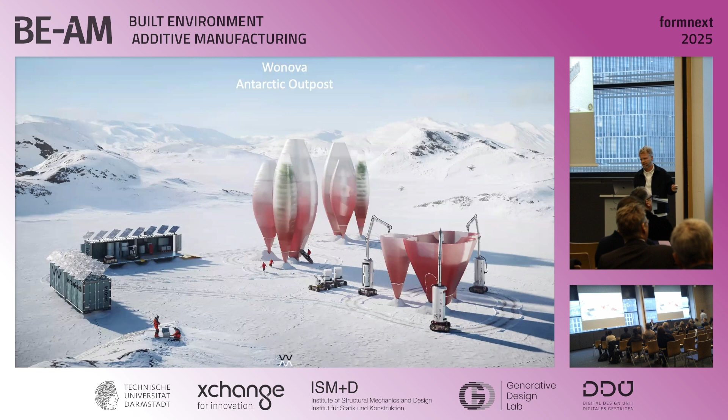This is a different kind of remote 3D printing, part of our Wonova project, which really got us started - or restarted - into 3D printing. We were thinking about how far you can go out to the Antarctic, what that might involve, and how to trigger people like you into what we're trying to do. But there was a more pragmatic approach within that project too, where we at least had a typical use case: thinking about renovation of facades. We know this is a large, up and coming market in Europe, and how might that be done in the future?

By pragmatic, I mean we stepped back a moment and thought about the certain layers to a facade - interior, exterior, structure, waterproofing, insulation - and we broke that down in an abstract way with a little bit of computation, which you'll see in a moment, understanding, as you saw in the last presentation, what that could be in the future.

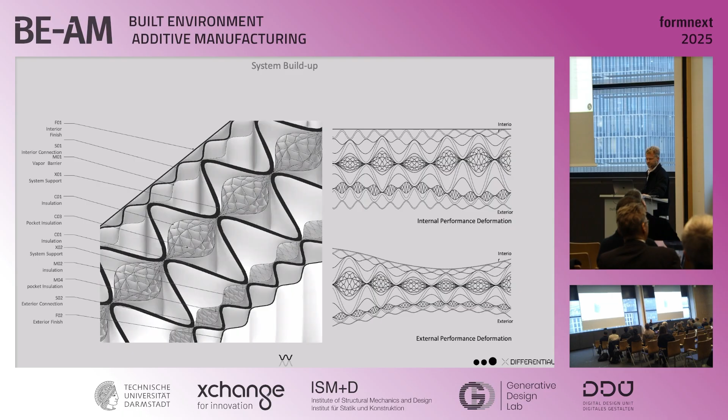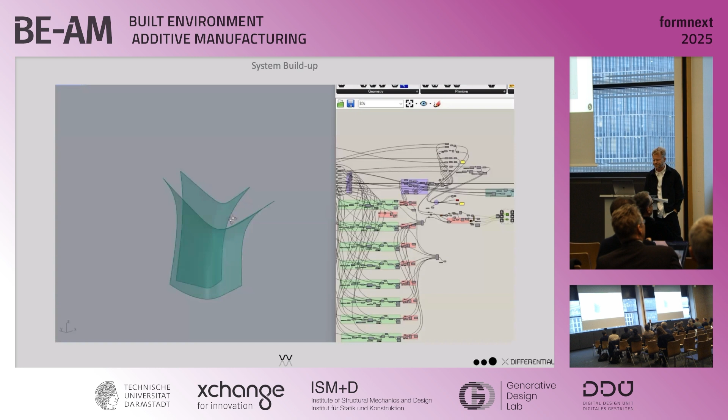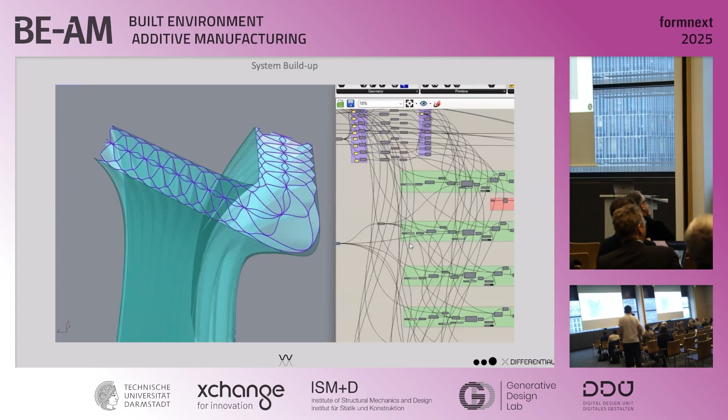With our friends from Differential - you'll always see we add our partners into the slides as often as we can, we think this is super important, just an aside, we don't do this by ourselves - the computation for Wonova was about determining the amount of structure or thermal insulation we would need. Of course you get the obligatory grasshopper screenshot to go with that, to understand what we might need for a building.

And then we took that even deeper. We thought - my particular background is in facades, where I know Uli from a former life - what could that detail be? We're looking here at our idea of thermal separation while maintaining structural continuity within this wall system.

But we weren't totally crazy. We had some help from our friends at Eckersley O'Callaghan, rather well respected, and they took us seriously, unbelievably, to think about what we might need, for instance, to get below a 0.25 U value. What would that take? In this case we're also using PA6 as the conceptual material. So not only is it a big vision, but we're saying okay, how might we get there, taking it as seriously as we could.

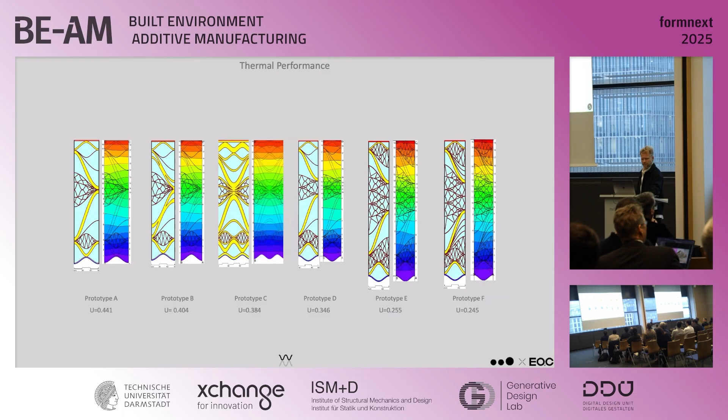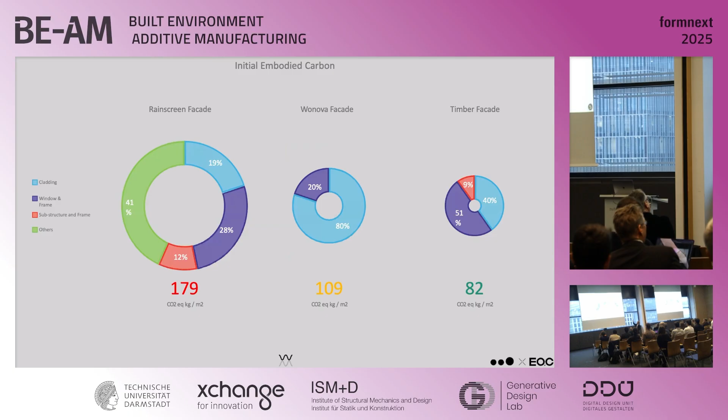The other side of the work they helped us on was to look at embodied carbon. Part of the project, and the goal of the project, was to understand that this could be constructed or printed, demolished, shredded, and reprinted on site. Your initial build's carbon footprint is not as high as a typical facade, but higher than timber. The idea is that if we can recycle, that footprint goes down precipitously - after 2 rounds of recycling, the carbon footprint goes down. That was another piece of the proving grounds of this project.

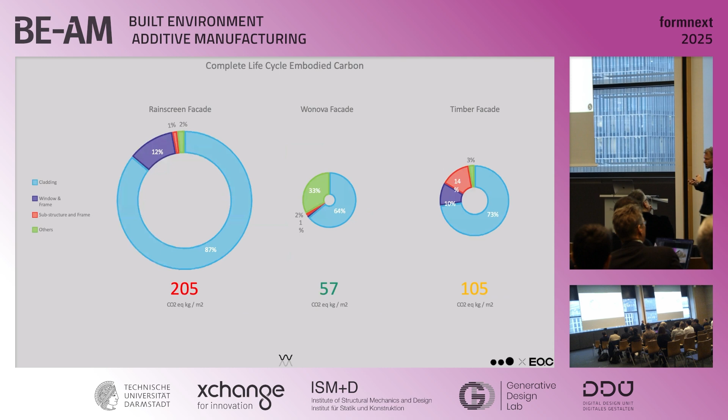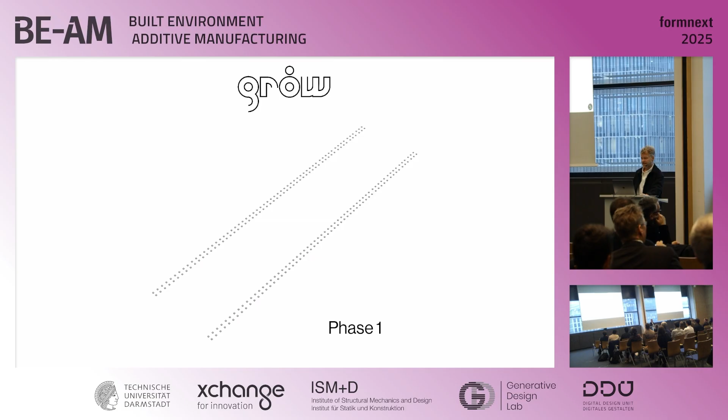We take that, again, to the next scale. Very interesting to see the guys from SSV do this at an even bigger scale, with somewhat less complexity perhaps. But this idea of grow was combining the idea of 3D printing with the idea of progressive housing.

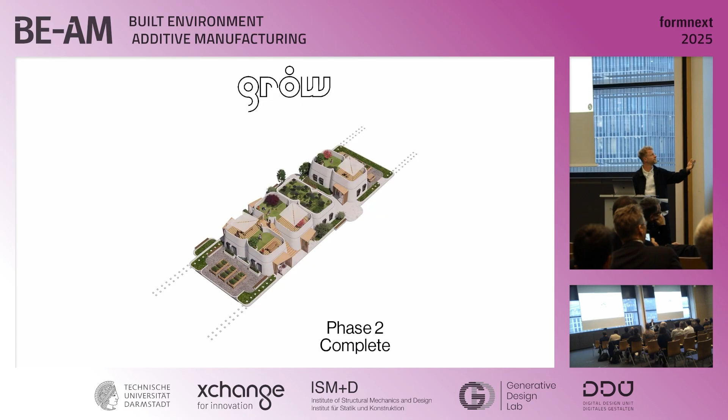So, back to phase 1. You might lay down the tracks, you have the gantry come in, you print the first phase of a house, someone can live there. Second phase, when they have enough money, perhaps, when the time is right, they print the second phase. Again, you see there's some ideas here of having prefabricated roofs and such. This will come back in a later project as well.

So the specifics of progressive housing, as some of you might know, is common in South America for instance, is about allowing people to grow. Our idea is using 3D printing in order to improve people's lives. So just like this, as we say, there's a young family, then the family grows, and grandma moves in, and you have the possibility of growing.

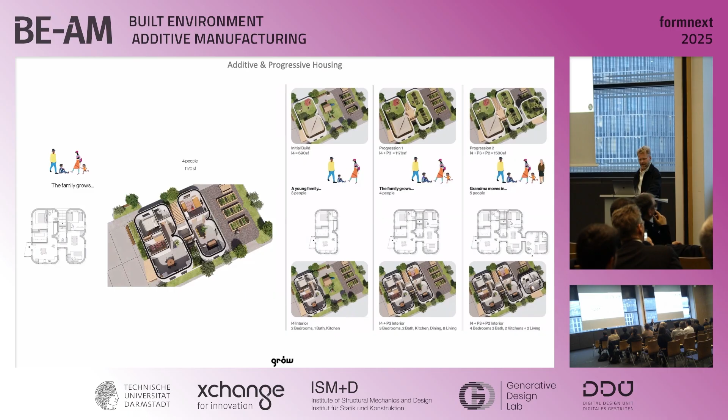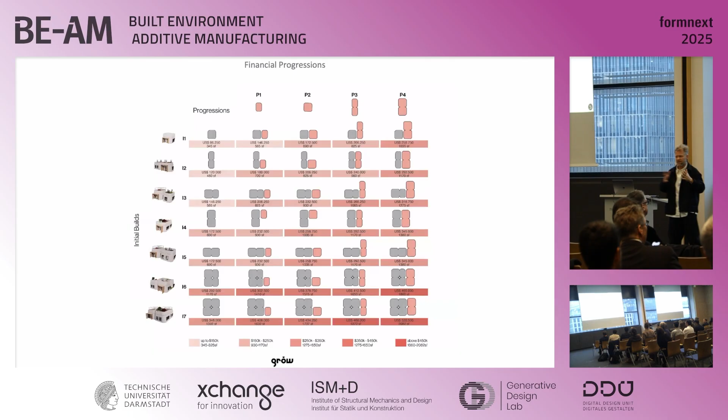And of course, within that, you could go from your smallest house, 350 square feet, $86,000, up to maybe 2,000 square feet and $520,000 over time, with assistance, and as we imagine it, with assistance from the neighbors in your neighborhood.

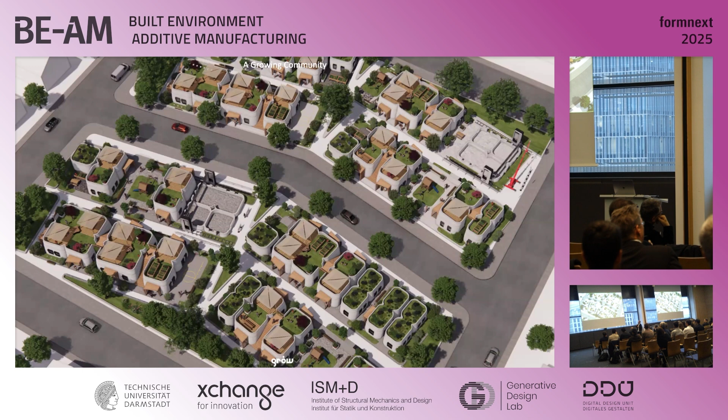This project was also about creating that community around progressive housing. There are companies and organizations such as Habitat for Humanity in America, where the project was based, and where people are helping each other. So we think about upskilling, sharing, shared spaces, and use of community spaces.

And of course, important with that is to bring in as much responsibility for the community and for the environment as we can, whether that's rain collection, adding greenery, creating small amounts of wind energy, and lots of green areas to be shared by the community.

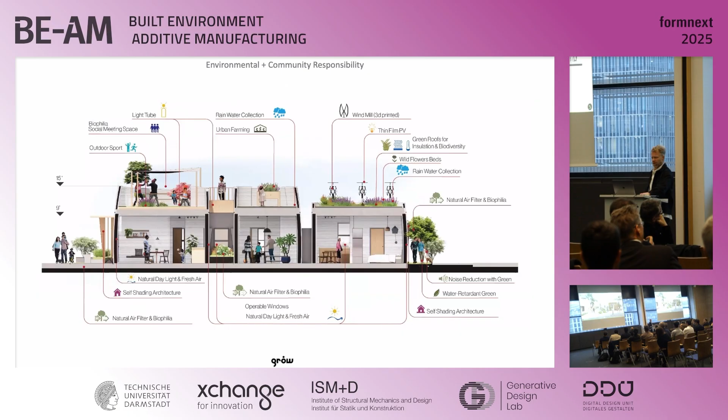And we think this is, and I'm really excited to see from the guys from SSV, that this could be a possibility, and the possibility of using a new technology to create a positive societal effect.

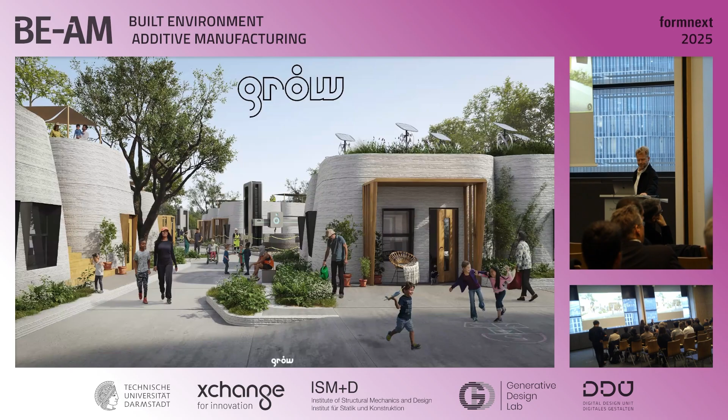Let's say at the opposite end of the financial and architectural spectrum from progressive housing, this is a project with an undisclosed client around the Mediterranean for a remotely located house in a harsh environment, where the client was interested in pushing the future and the technology of the possibility of their house, and we thought, well, it's a good instance to think about 3D printing with on-site materials, for instance.

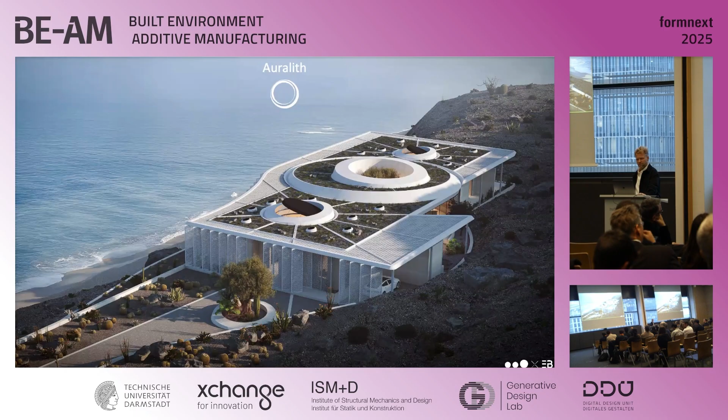So the big idea of the project, from the realization to the process, is to extract some soil, rocks, gravel, etc., from the side of the mountain, and use that for the production of the house. Luckily enough, there was some usable materials for the concept.

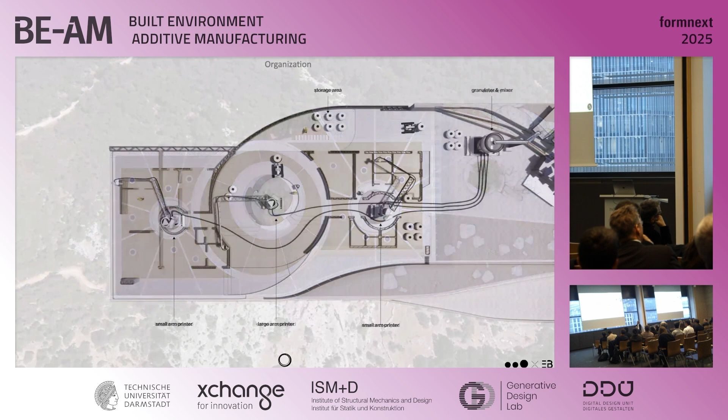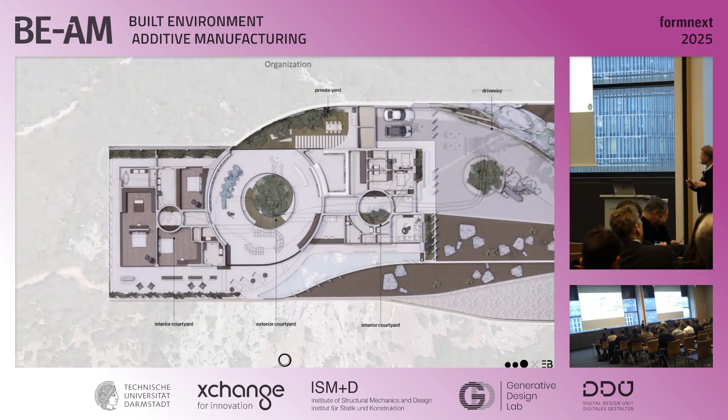And so what was important for us is using the organization of the construction production process in the organization of the house itself, and of course the end aesthetic, where you see, for instance, the courtyards are created where the robot arms are, and then the way the roof is divided is about being able to prefabricate it.

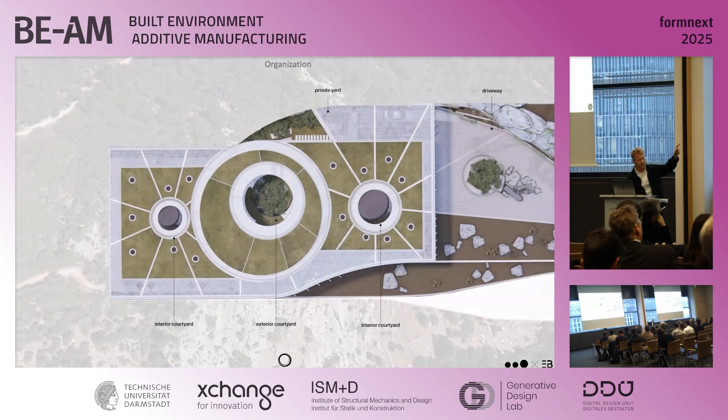And as I'll repeat again, it is a house first, right? It's not just a 3D printed house, but it's a house. And I think this is part of where the industry is now and should be.

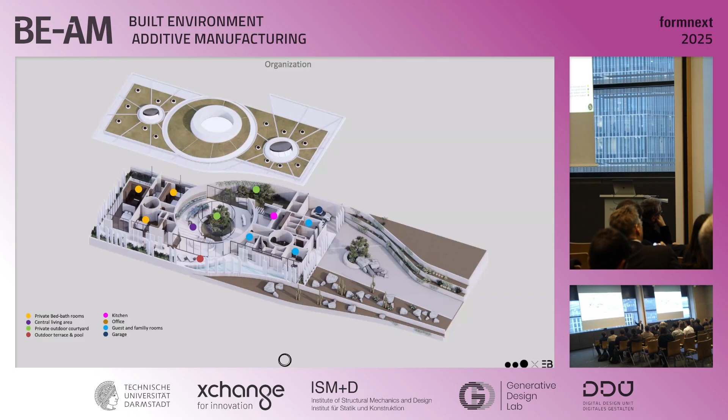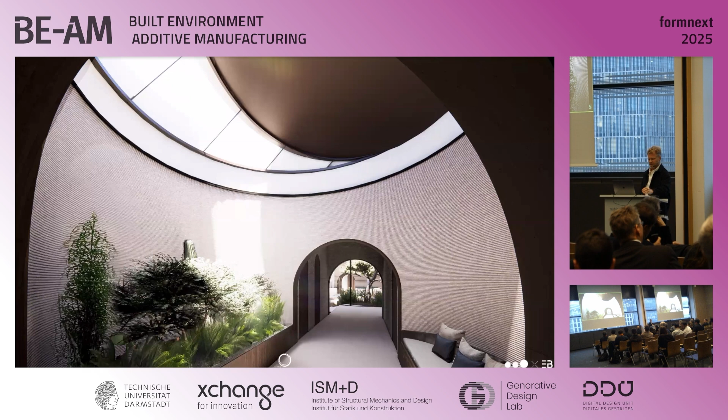So in the front, there are common areas for families and guests. In the middle, the living area, and towards the back, the private areas for the family. It's important that spaces like this, which is where one of the small arm printers would have been, but is now the entrance and the main distribution area for people going to their guest bedrooms, has a wonderful effect and a beautiful appearance for the users.

Then in the middle, of course, the whole house is centered around a central exterior courtyard, and the kitchen, living room, a pool, the back patio, etc.

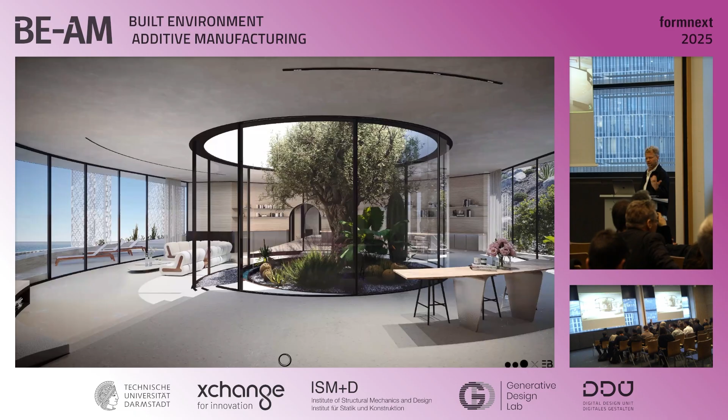Once again, remembering exactly how it was built and using that for the effect of the living space. And it sits then kind of gently, simply on the edge of the mountain.

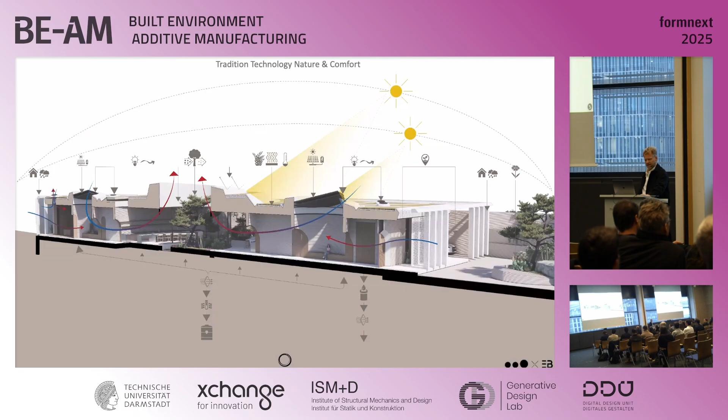So for instance, in the small courtyards, you have the small wind lenses. The automated screens are also meant to catch some humidity in this sort of desert and oceanside climate. The roof is xeriscape, this kind of desertscape, which would also collect water when it rains, because when it rains, it pours. And of course, the large wind lens in the middle is the main ventilation and light providing area of the house.

And of course, this here is looking from one of the small courtyards through the middle, through the other, and this is really kind of what the house is about.

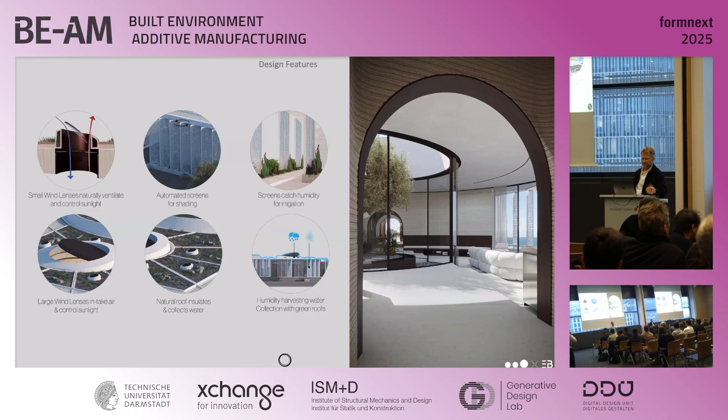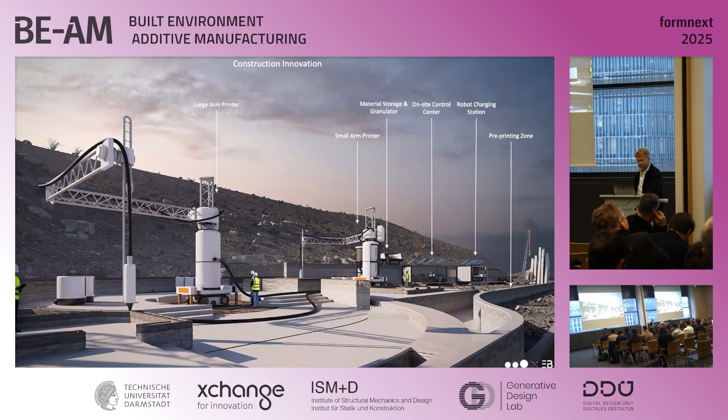Luckily, we've begun to realize things as well. So most recently, and what you can see at BE-AM and also on the Smart Materials and Nagami stand, is the Septa chair, where we've begun to lay maybe that first layer, or the next layer, in our process of bringing 3D printing into design.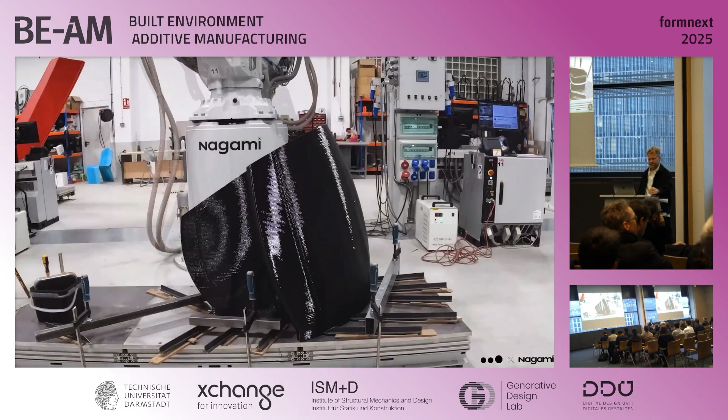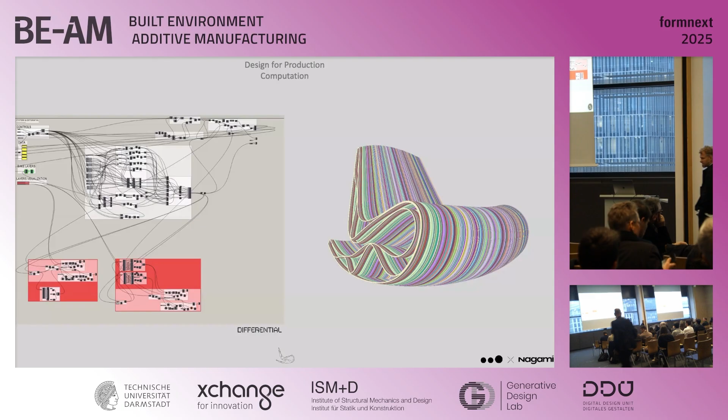In this case, once again with our friends from Differential, we sliced the chair in a way that's very important, given the complexity of the form. We sliced it so that there's an alternating set of lines, or of paths, I should say.

When you see the chair, I encourage you to check it out at the BE-AM stand, and there's a different one also at the Smart Materials stand. Sit in it, feel it, and for us what's really interesting with this path—so it's an AB-AB combination. When it starts over here at the end, you will see in the blue, it will double back. And each at the top and on the bottom and the back, it needs to switch back and forth.

And this, for us, of course, was a necessary solution to solve the kind of 3-layer problem. Otherwise, you need an even number of layers in order to make a continuous loop. So that solved that problem.

But then it gives us something much nicer, which turns a 3D printed chair into a chair that's 3D printed, meaning that we then really can focus on the details. We focus on the way that each surface hits the other. We focus on the way that the structure hits the surface below. And we focus also in a very, very strong way with the guys from Nagami, who really can pull this off in an unbelievable way on these seams.

And for us, this is like the most important detail of the chair, or the real detail of the chair, what you won't see anywhere else, besides just the quality, but to say, okay, this is now what we feel is something different. We're taking this a little bit to the next step. So first of all, this is a chair. It's comfortable. Like I said, I encourage you to go sit on it. It's lovely. I say that as objectively as possible.

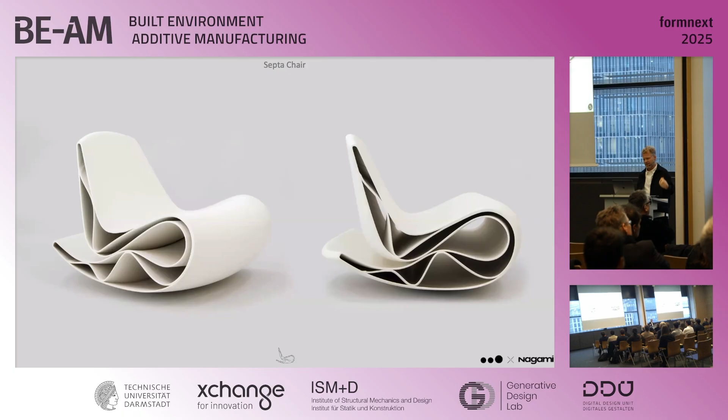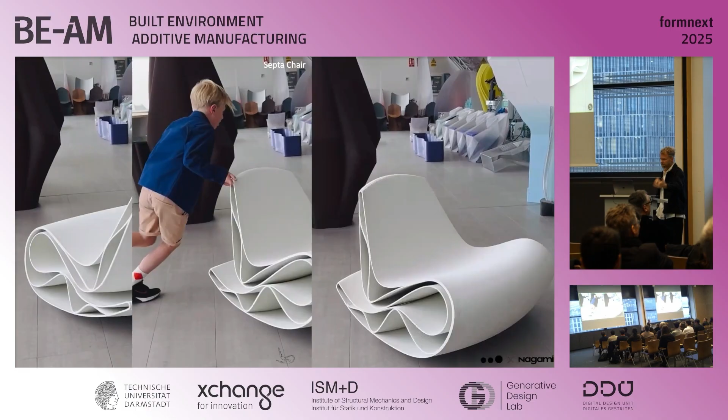But we are now being able to take some of the ideas that we've had and push them forward. And we hope that this is now one small layer for us, for everyone else, and moving towards a wider spread, more democratic use of 3D printing. Thanks.

Oh, you're not on. Okay, now officially, thank you Rob. Was it time? No, there was a raised hand. Or was it a stretch? Oh, it was a stretch. Yes, no cracks. Any questions from the audience? Obviously not, to be honest.

Where's the house, the second one? Undisclosed location, unfortunately I'm not allowed to say. But let's say a desert environment along the ocean. That's all I can say, sorry.

It takes... yeah, so Adi? No. Thank you, thank you for the talk and the presentation.

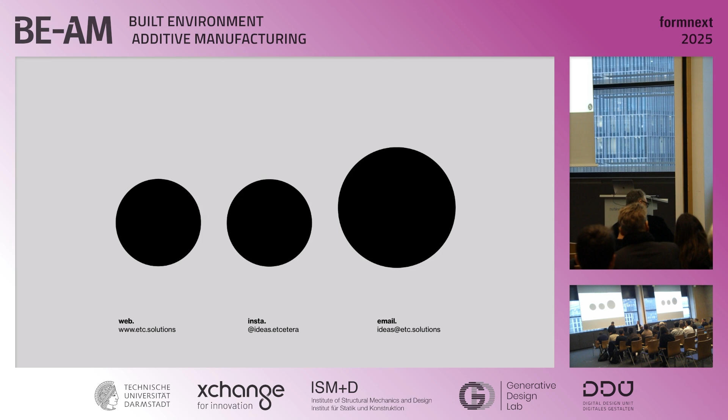My observation at Formnext, really my personal observation, is that we were promised to get custom-made shoes, glasses, everything — they would scan our bodies and then custom-make the things we need to wear. What I see at Formnext is a lot of serial production; AM 3D printing is used for serial production. Did you ever have plans to customize furniture? Is that of interest to you, or do you have an explanation why things are more serial than we expected them to become?

Yeah, I mean, you have to ask Manuel when he gets in here why it's not possible. But yeah, of course, everybody asks. We were at a fair a couple of weeks ago, and everybody, because 3D printing is no longer so new, even for folks on the street, asks, oh, you can customize it, you can do anything you want. Can I have it bigger? Can I have armrests? Can I have a headrest? And at the end of the day, there's still difficulty in that, right?

Like, it is possible, and for sure we have this for the chair, for instance — it is possible and it's easier. But in the moment, moment to moment, the idea for the chair particularly is that it's meant to be sold. This is a real objective, yeah? It's not a joke. It's not meant to be only a museum piece, oh that would be lovely. It's meant for you to sit in it.

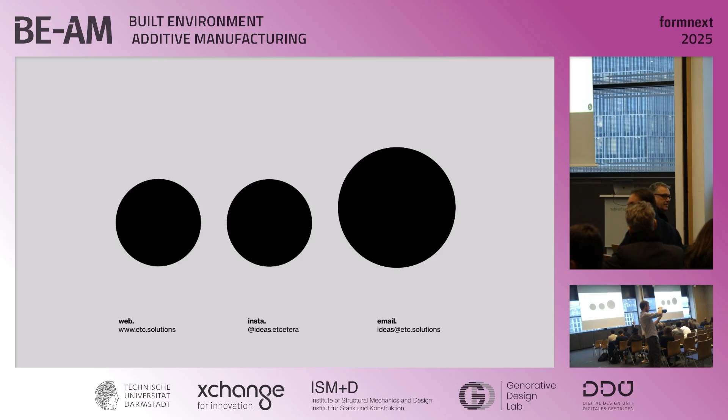Thank you for the nice presentation. I assume the inner infill layer would give you the ability to control the flexibility of the chair, kind of. Is this something that's been analyzed, like for example in finite element analysis, beforehand, or just tested by iteration and printing?

There was only testing afterwards. So in that sense, it's more like typical furniture. We understand the basic shapes, the ergonomics. Nagami, as producer, understands the material and the process. Then there was some back and forth on optimization and some testing of materials. But it's more like typical furniture — we don't normally do a finite element analysis on a chair, and so we wouldn't do it here either.

I think getting beyond that is also important, right? It's not that we don't need to do it, it's just not always necessary. I think this is a good realization, a good step for us. But fair enough, not to say we didn't think about it, or that we didn't want to do it, or that we wouldn't think it was cool to do the diagrams — it's just not necessary.